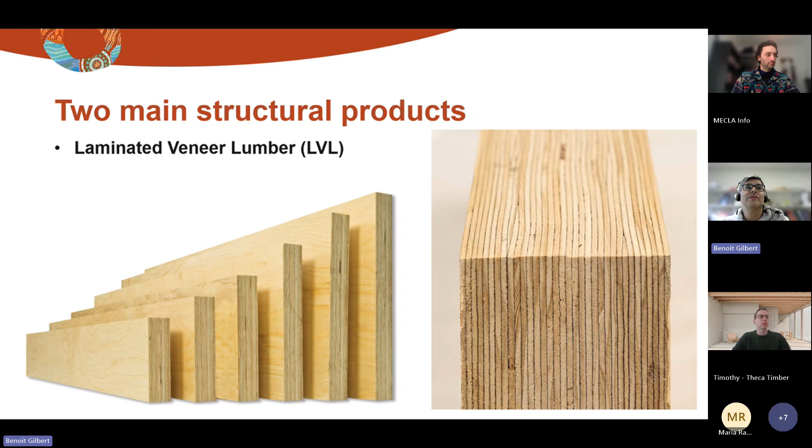The steering committee decided to look at two different structural products. The first one was LVL, laminated veneer lumber - I think you all know what LVL is, put it in the chat if you don't, but I believe you all know. The second one was glulam.

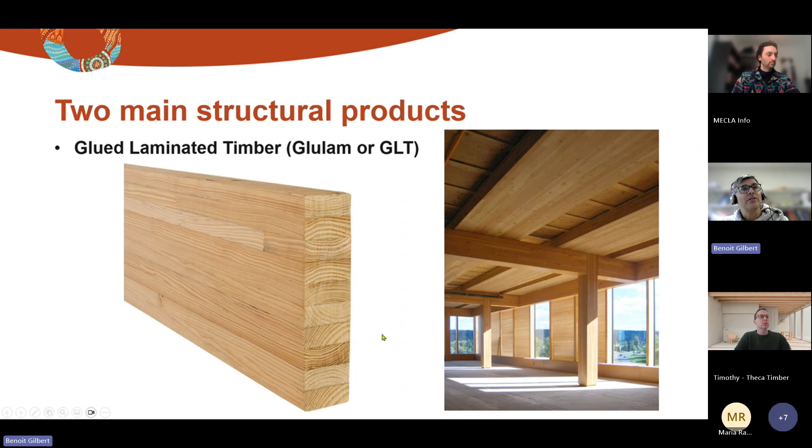So we're trying to look at what we can manufacture from these two products using the resource of interest. DAF's objective, or DPI's, was first a literature review. Then we needed to get some trees and look at the characteristics of the resource. Then we needed to assist and do some full-scale production trials, and then test the manufactured products.

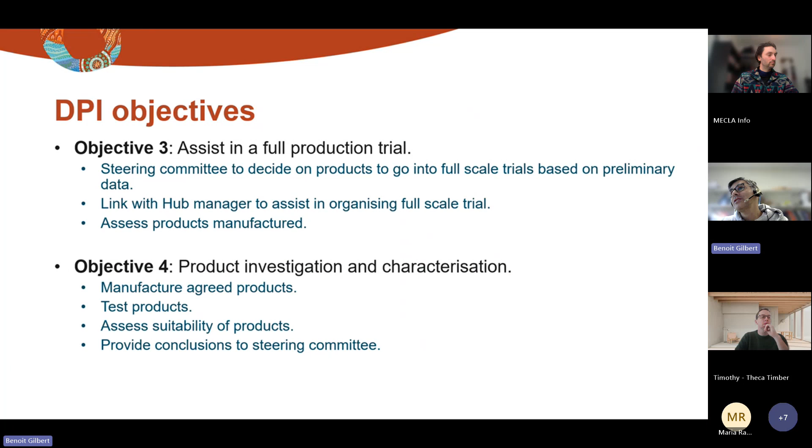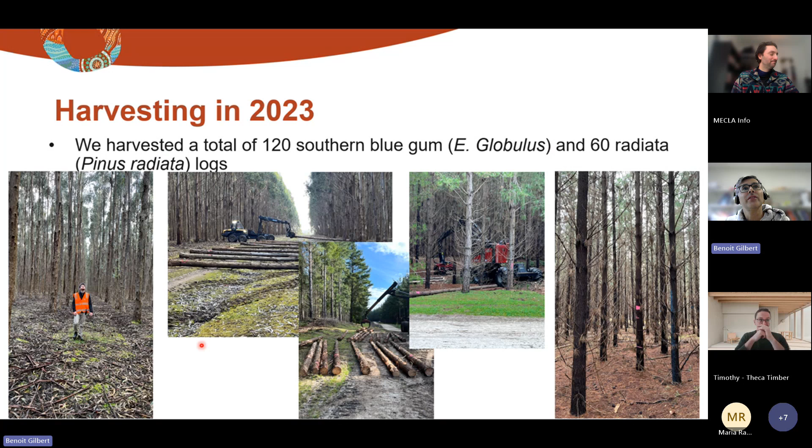So we harvested 120 blue gum logs and 60 Radiata logs. We targeted two different plantations for the blue gums, 15 years old and 19 years old, and for the Radiata we looked at first thinnings at 11 years old and second thinnings at 18 years old. All the diameters we targeted were average or relevant diameters for the project where there was a large volume of them.

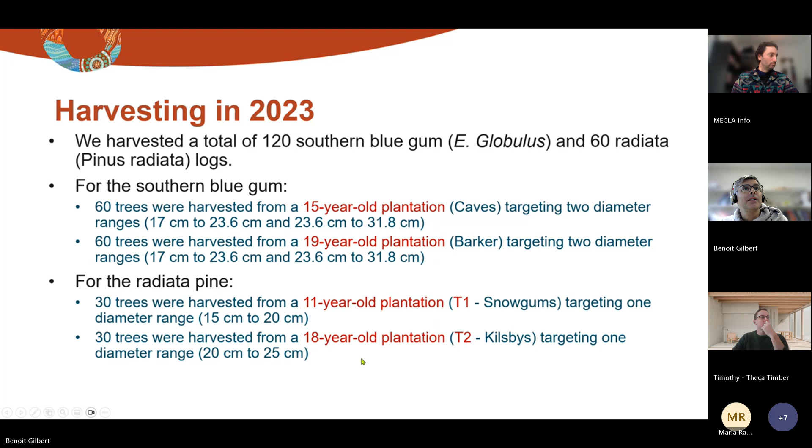Yeah, so there used to be a log. To me, peeling is like when you've got a toilet paper roll - it's basically the same. You peel the trees into veneers.

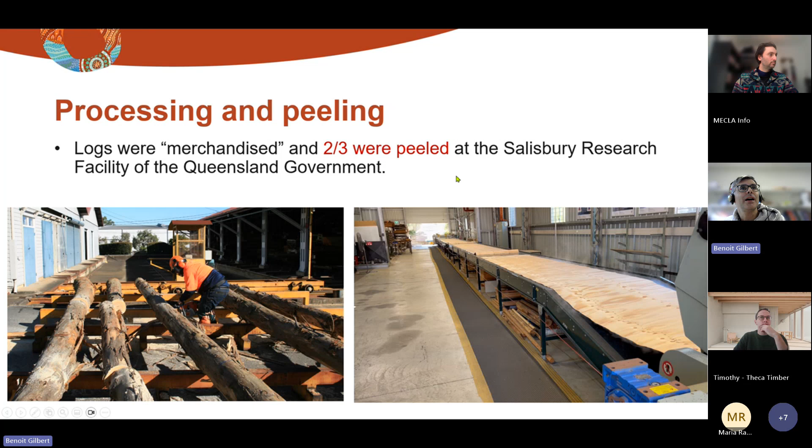So we've done that. We peeled two-thirds of the logs. We managed to get like 3 kilometers of veneer at the end. You can see a little bit on the right how much we peeled, quite a lot - one of the biggest at the Salisbury Research Facility.

And then we look at the veneer. We characterize the veneers for visual grading, MOE distribution, and also recovery, just to make sure that when we peel them, we've got enough veneers to manufacture LVL.

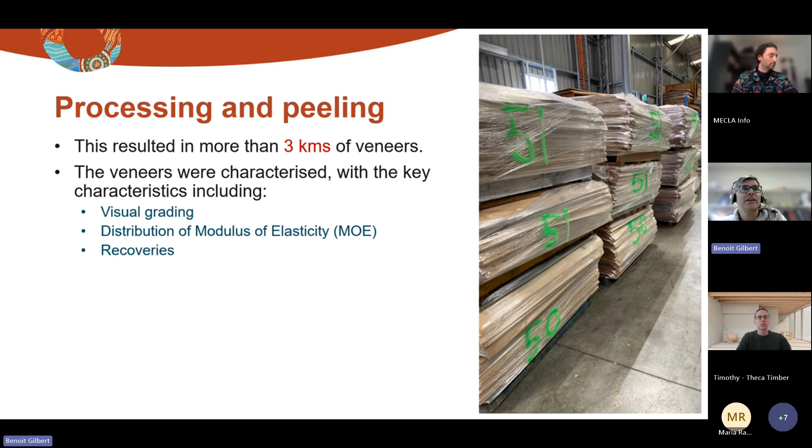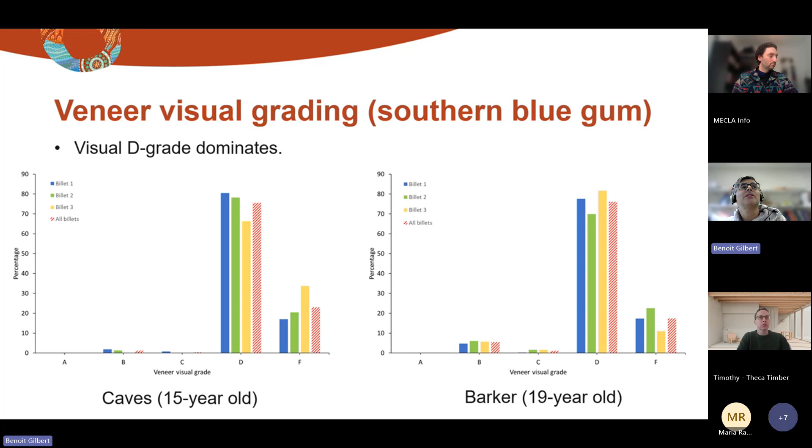So interestingly, in terms of visual grading, we mainly have D grade. A grade is the nice top visual appearance veneers. D grade you can't use that for visual products. That's what most of the veneer were - D grades, a few failed as well, and it was the same for Barker. We only had D grade veneer, or veneer that we couldn't use in the manufacturing.

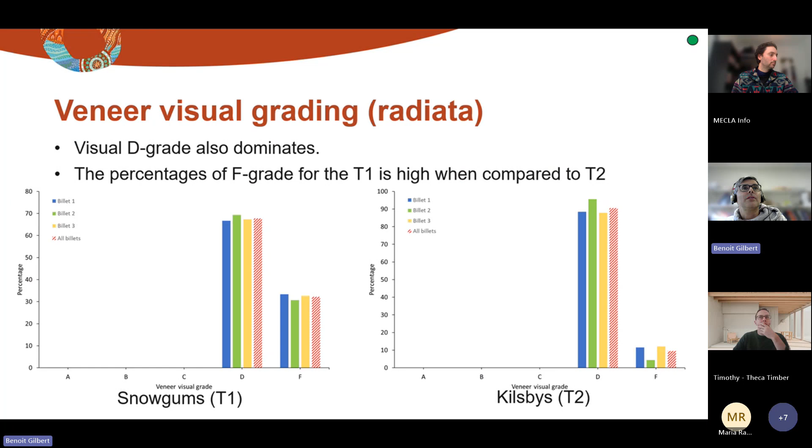So the result of that is that you cannot make appearance LVL - it cannot be manufactured. You're always going to get a product that doesn't look nice. It doesn't mean that it doesn't perform, but in terms of appearance, you won't be able to do that, unless you buy nice veneer from another source and put it on the face.

But however, if you're looking at the MOE distribution - if you know MOE - for the 15-year-old blue gum, the average MOE of the veneer was 15,000 MPa. For the 19-year-old site, it was 20,000 MPa. This is high, this is very, very high. So despite being a resource grown for volume, it still produces veneer of very, very high MOE values. MGP10 is half of what we get on average for the blue gums. For the radiata pine, we had on average between 8,000 to 10,000 MPa.

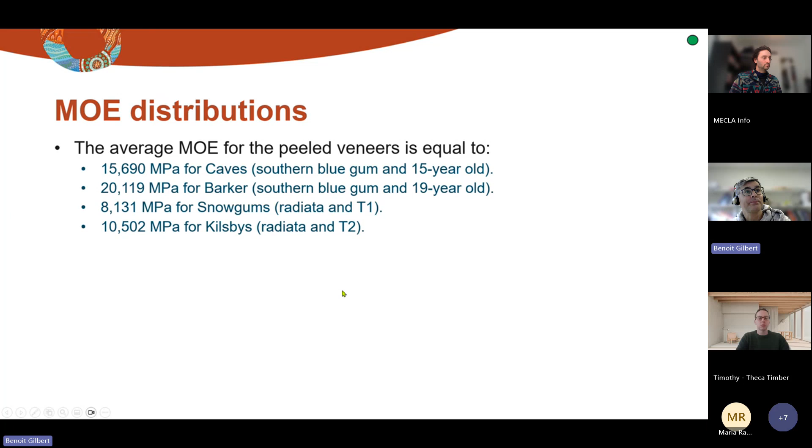So just a bit of distribution, MOE distribution. If you look on the right-hand side, this is some MOE distribution for the 19-year-old site, and you can see that 50% of the veneers got an MOE higher than 20,000, and we can even go up to 30,000 for the top veneers. For the younger site it's a bit less, but still we can recover a lot of veneer with very high MOE.

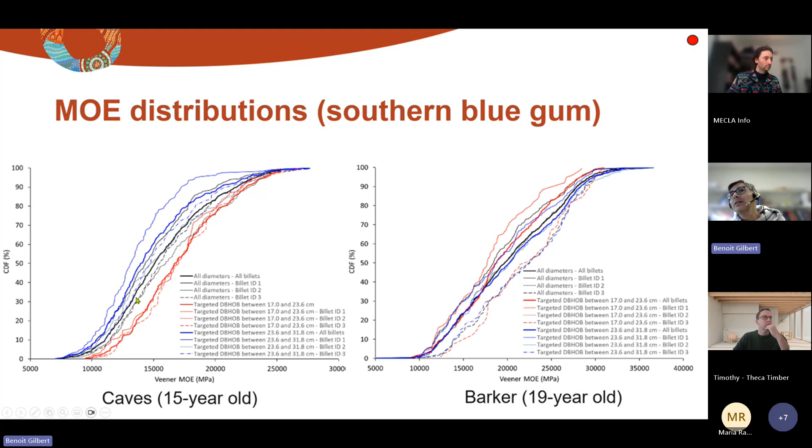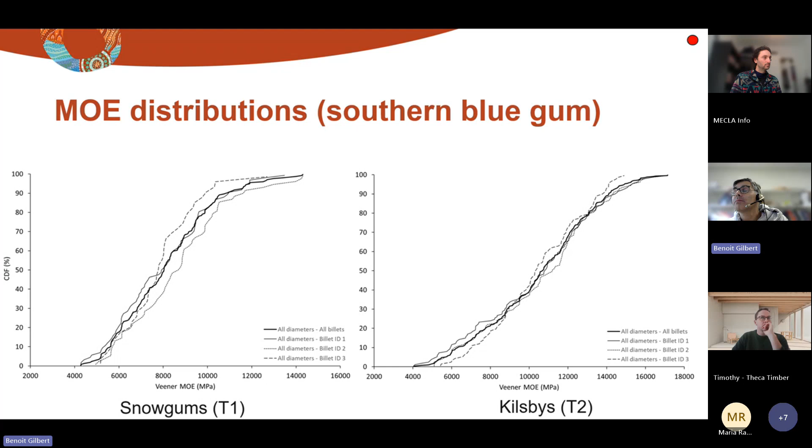And for the - that should be a radiata pine - for the radiata pine, we've got of course the MOE is less, but we still got, for instance for the T2, still 50% of veneers got an MOE higher than MGP10. So we can still recover some high quality veneer with high mechanical properties.

And if you're looking at the recovery, it's basically similar to the current industry recovery, which means that when we peel, we're not going to reject more veneers than is actually currently encountered in industry. So recovery is good, it's matching what the industry sees, so it can be used. Point is, the resource can be used for manufacturing LVL.

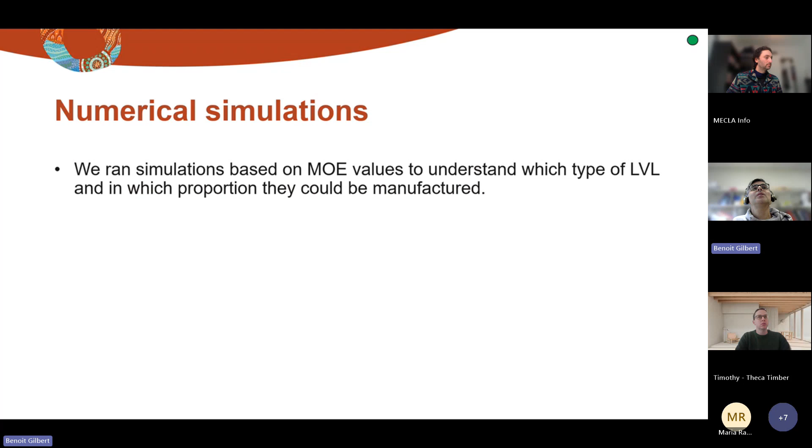So we've done some numerical simulation just to understand which type of LVL and which proportion they could be manufactured in. And we try to look at different scenarios - either manufacture 100% blue gum LVL, or hybrid LVL, which uses both radiata pine and blue gum veneers. And we try to do some LVL 15 to LVL 21, so it's very high - the 15 and 21 are the MOE values.

LVL 15 and 21 are very high value products, very high performing products. And that's what the market analysis shows, that there is a niche market for very high performing LVL to replace steel in houses. And LVL 12, which is very similar to MGP 12, is going to be a commodity product. So we're trying to see if we can manufacture commodity products as well as very high performing products from the resource. And that's the interesting part.

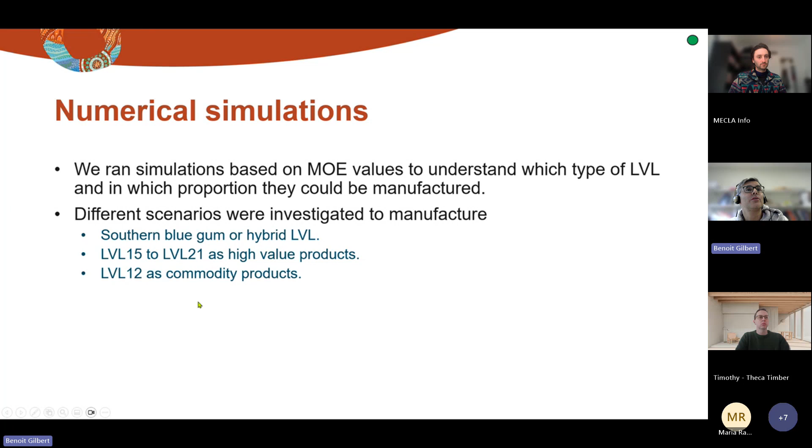So if we're only doing blue gum veneers, a manufacturer could use 80% of the volume of the veneers to manufacture LVL18, and then we're just going to get 20% to use in the low performing products. However, we could use 100% of veneers to manufacture LVL15 - so we can use all of the veneers and we know we're going to get LVL15, a high performing product.

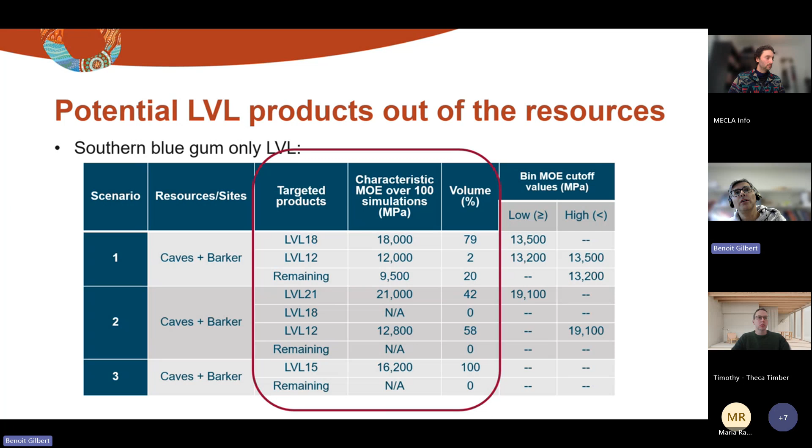And then if we want to go to even higher performing products, we can use 40% of our volume to manufacture LVL21, and the remaining volume, 58%, we can manufacture LVL12. So the idea with this simulation is a manufacturer could basically have two different products - one commodity product, but we still have enough volume to manufacture one of the high performing products.

And if we look at hybrid, it's the same. We alternate veneers between blue gum and radiata pine. We can use 23% of LVL18 and 64% of LVL12, or we could also manufacture 63% of LVL15.

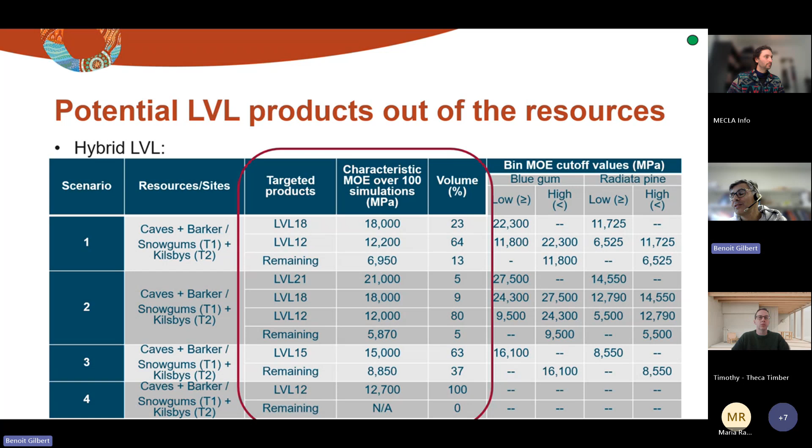But if we're using all of them, 100% of the veneer can be used to manufacture LVL12. So there is a high potential to manufacture high performing products or commodity products with the veneers, and that's a big outcome for the project - yes, you can manufacture from commodity to high value products with those resources.

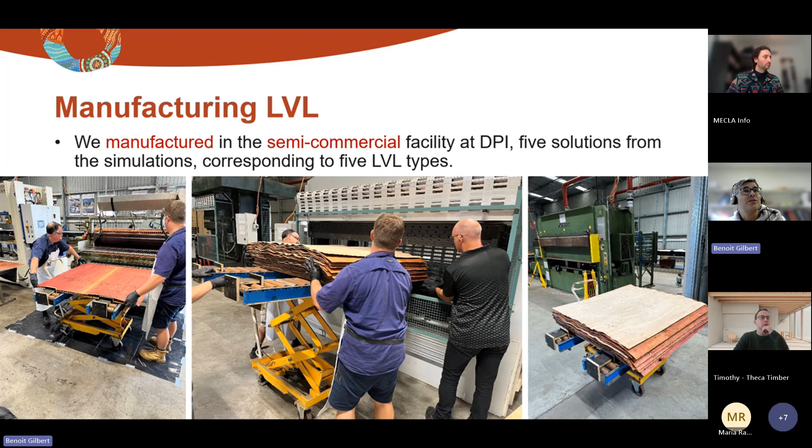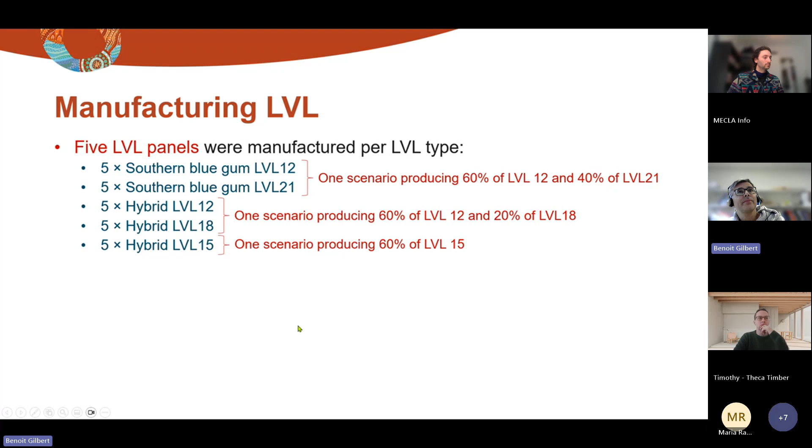Then we went on to manufacture the LVL. This is a team at Salisbury manufacturing some LVL in our semi-commercial facilities. We did 5 different types of LVL. The first scenario, we can manufacture LVL12 and LVL21. Another scenario, a hybrid where we manufacture LVL12 and 18. Another one, we're just trying to do 15 as a hybrid product. So we manufactured those scenarios and tested them in bending, shear, and compression.

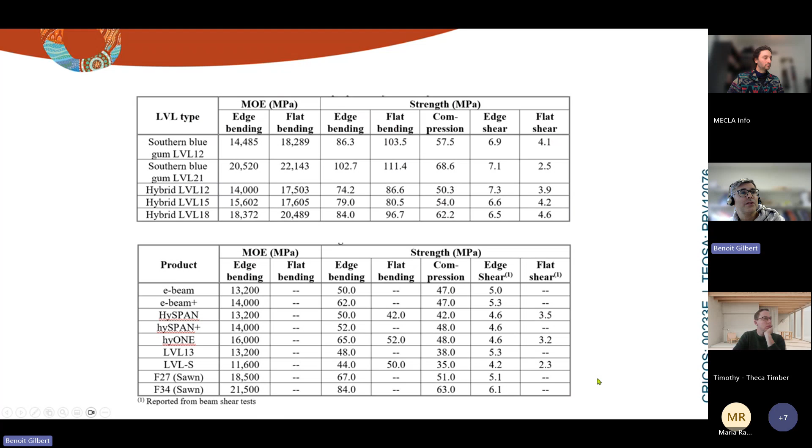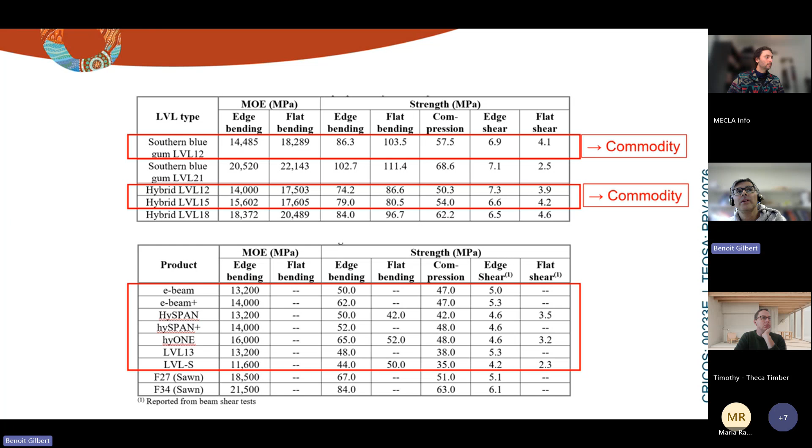When we've done this, at the top are our results, and at the bottom are some LVL that you can commercially buy. If you're looking more at the commodity, which is LVL12 and LVL15 - a bit at the border - it either equals or performs better than the commercial products. So we can manufacture products that can directly compete with commercial LVL.

If we're looking at the high-performing LVL, you cannot find some on the market, so we compared them to the F27 and F34 sawn timber. Once again, they perform as well or better than the very high-performing sawn timber. So if you can't find F34 sawn timber, you could actually replace it with one of the high-performing LVL.

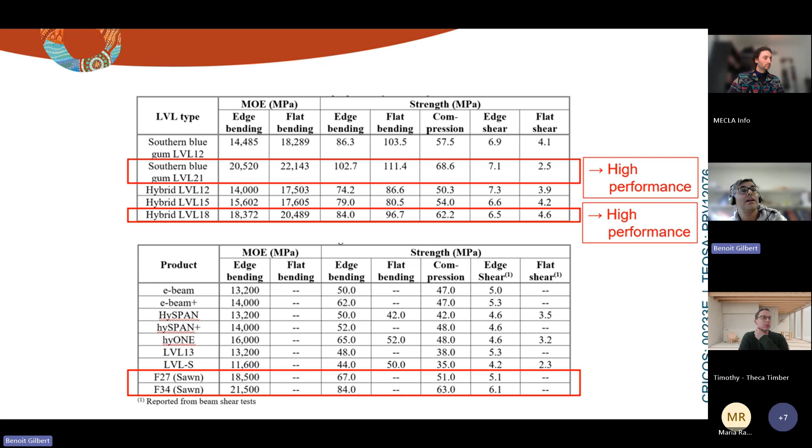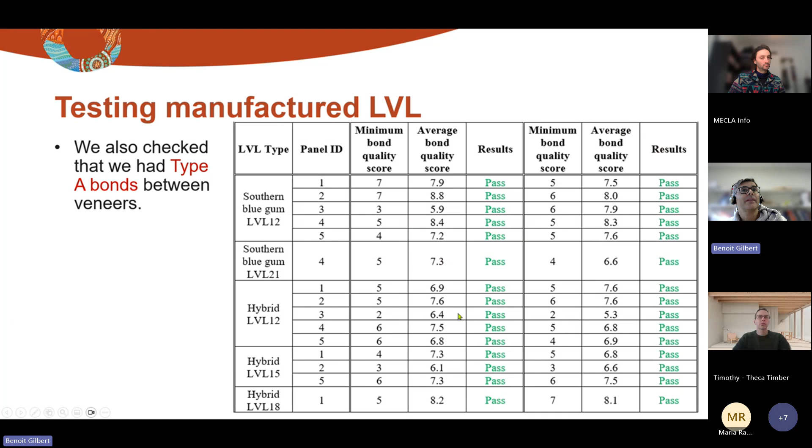Yeah, that's how it comes. We also checked that we can glue it, and you can glue the LVL, so you can pass all the durability bond tests between the veneers. So we know we can glue it, we can manufacture high-performing LVL.

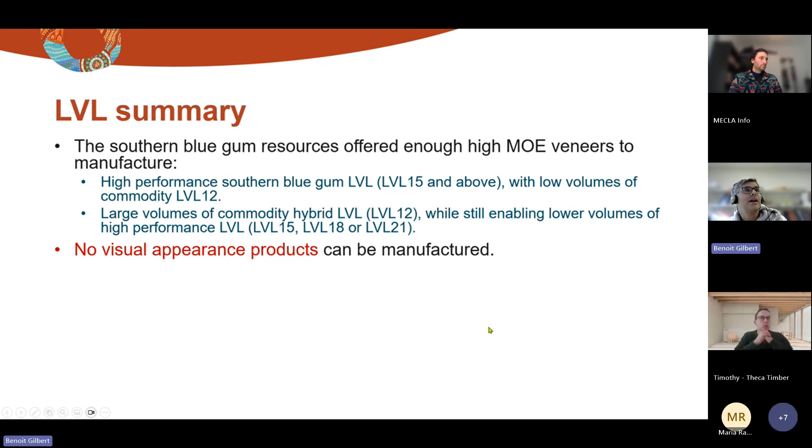So in summary, basically the resources offer - you can manufacture high performance LVL and a little bit of commodity, or you can do a lot of commodity if you do hybrid, but you can still get a lower volume of high performing LVL. So you can have different strategies, but you can get basically good LVL products if you want, in one way, but you just can't get visual appearance products. And we can glue the veneers - it's not an issue, just a little bit of a trick in the glue manufacturing process.

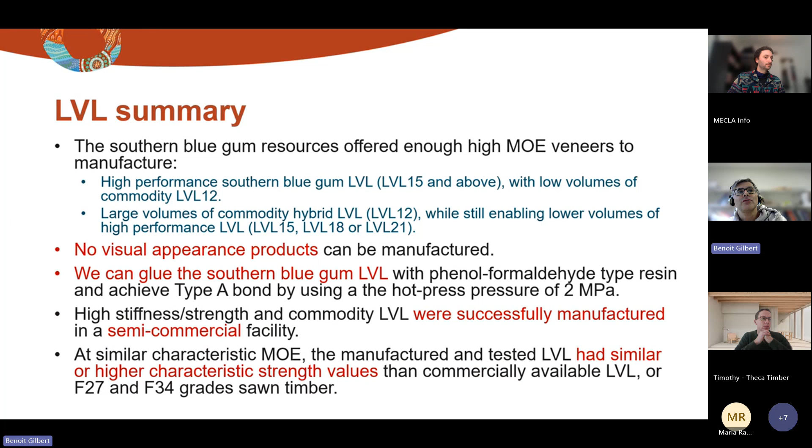All those products are as good or better than commercial products. So it could be manufactured, and it's a no-brainer. It can be done - we've done the basic research for that.

It can be done. The issue with LVL is that you've only got one company doing it in Australia, and they've got their own resource. Hopefully you'll get another one starting soon in Victoria, but not a continuous process. There are companies in Australia which just still do not have the capacity to manufacture the product yet, so they will come. But basically, that study shows that the resource will work for that.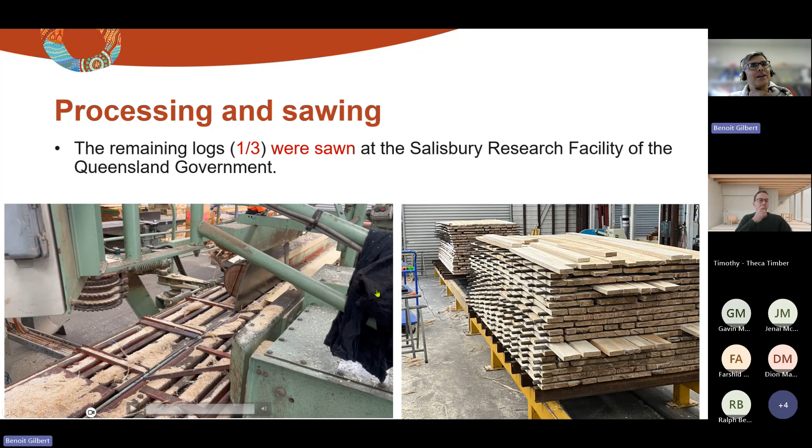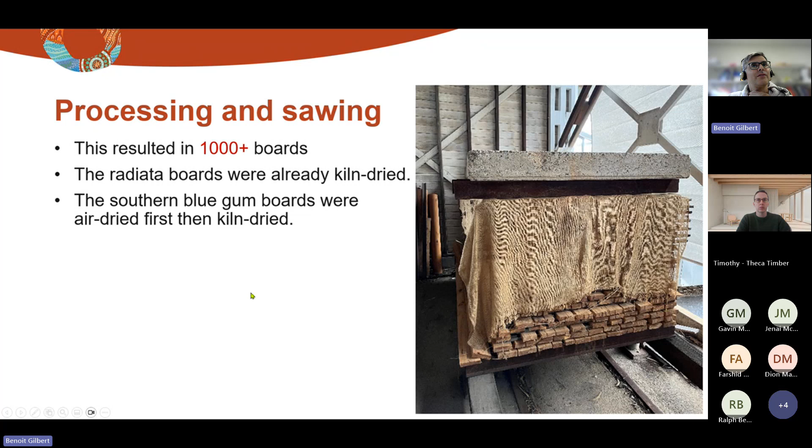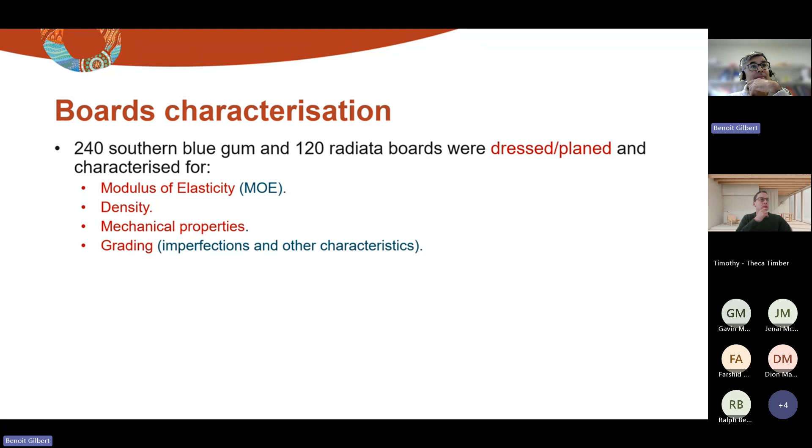We've got about more than 1,000 boards. We dry them, either kiln dried or air dried, to get the final boards. Then we took 360 boards - we dress them, plane them, and characterize them for MOE, density, mechanical property, and grading. We grade them according to the Australian standards, and measure the imperfections before and after planing. The issue with globulus is that it's a species that can twist and curve a lot, so it doesn't stay straight when you dry it. We try to characterize the imperfections just to give a bit of information to the industry.

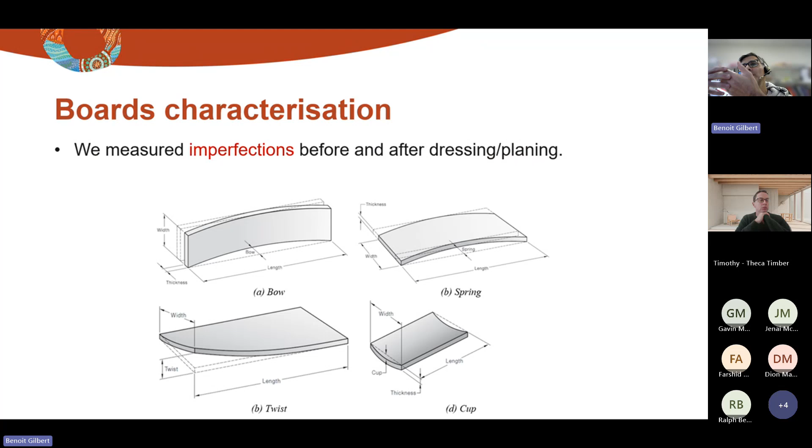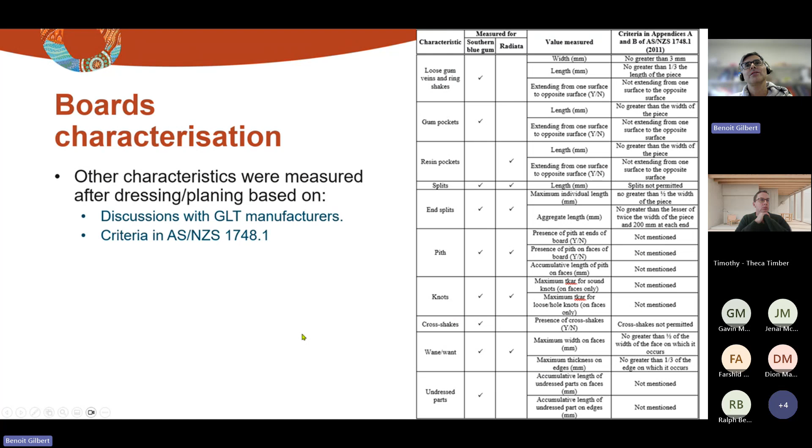We also looked at a lot of different characteristics in the Australian standards. I'm not going to spend too much time on that, but just to give information about the industry and what the resource looks like.

Then we test the board in tension, shear, compression, and measure MOE and density. Just to quickly show some results, this is tension for the southern blue gum, and you can see on the right hand side a very large variability in the MOE results. You can go up to 20 MPa in tension, up to 140 MPa, mainly due to the knots and other defects.

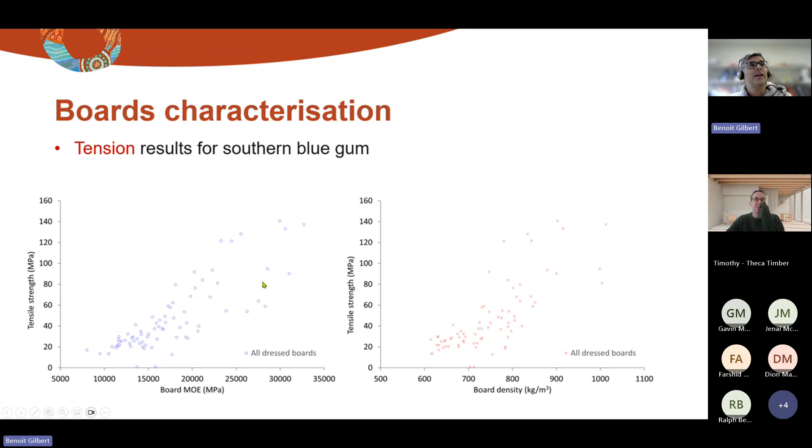If you look at radiata, it's the same. You've got some boards that couldn't even take the minimum load the machine was applying, but it doesn't take a lot of tension for the radiata. You can still try to fit some equations, and I won't spend too much time on that, but you can start to predict the strength based on different equations we developed.

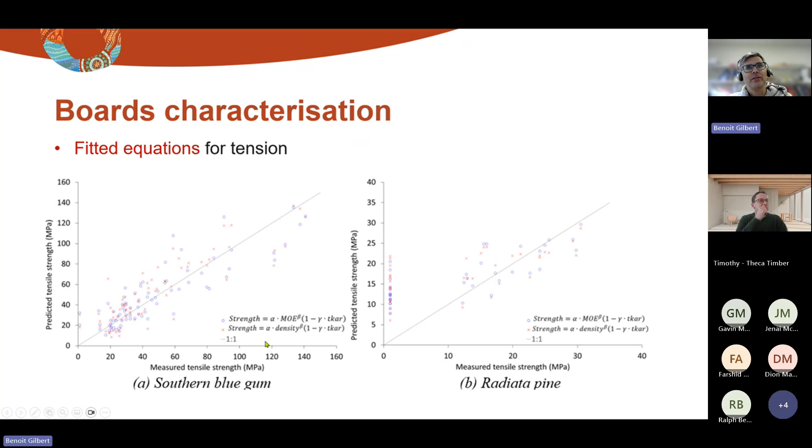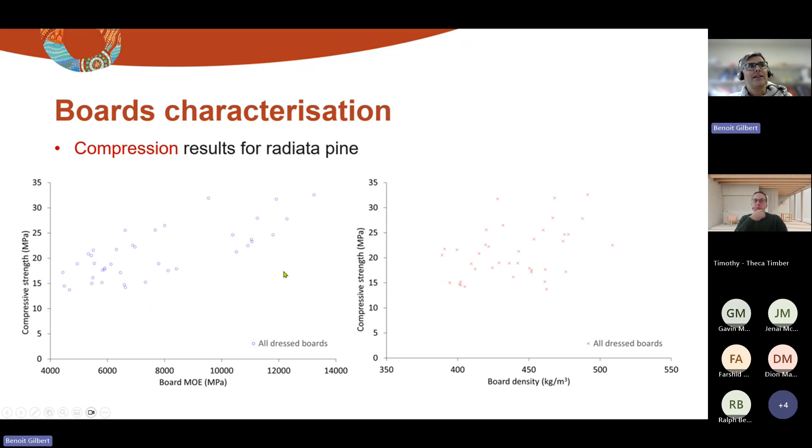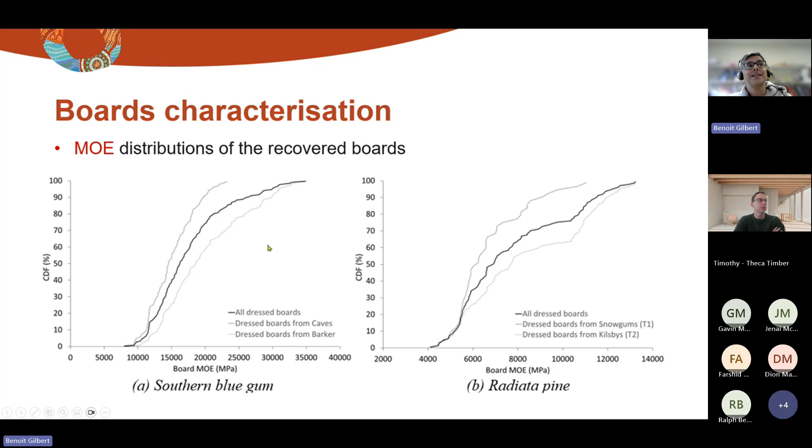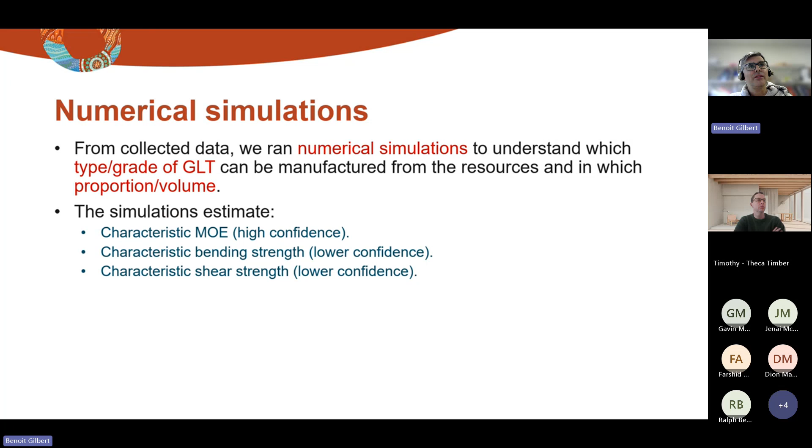Again, we did some numerical simulation to understand which type of glulam we could get and in which volumes. We estimate the MOE, bending strength, and shear strength with different levels of confidence in the results. The market analysis shows basically what we need.

We need GL18 and GL13 in the Australian standards. GL18 is a high performing product, GL13 is more of a commodity product.

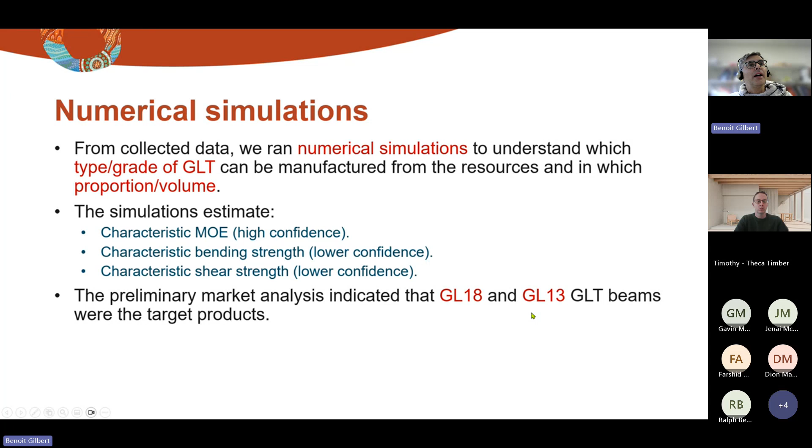So if you look at different scenarios, if you try to do only one southern blue gum glulam, you should be able to get about a GL17, GL18, maybe GL13 in bending strength, but we're not very confident with that value. So we're going to get about GL17, 18 just by only doing one blue gum product.

If we try to do two different products, 40% of the board could be used to do a GL18 and 60% to do a GL13. So you can still use your boards in different ways to be able to do two different products.

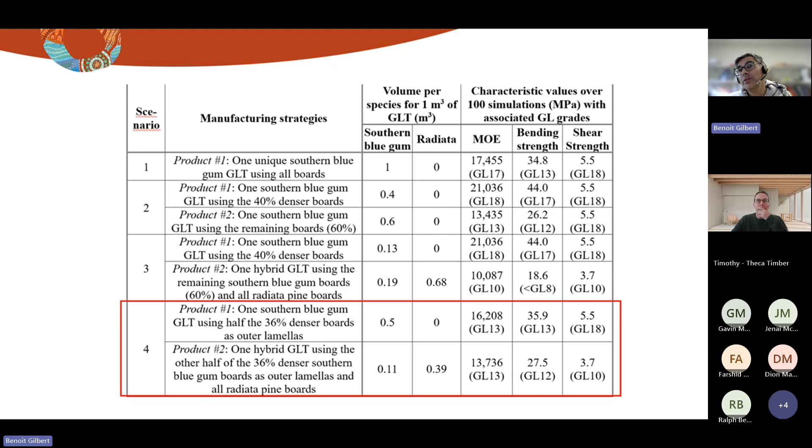If you try to do a hybrid product, you could also get a GL10 and a GL18. Again with hybrid products, you could get two GL13s, one purely blue gum, one hybrid. So there is a way to mix your boards to get both commodity products and high performing products.

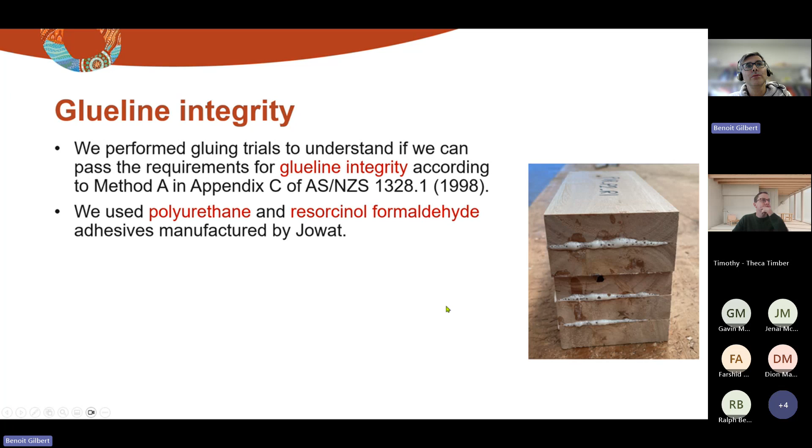We did some gluing trials. We tried to glue the boards for durability, using different types of glue, and we found that the high density boards, greater than 850 kilograms per cubic meter, were very hard to glue. We found that if you put them through a planer first and sand the boards after, you actually manage to get satisfactory bonds. But we know that in a commercial trial, you need to be careful how you glue those high density boards. It's about 20% of the boards.

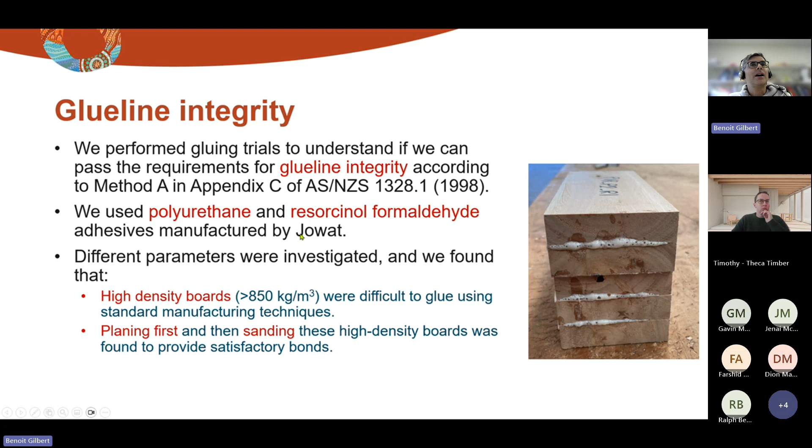We did some finger jointing as well. We had a bit of an issue finger jointing the boards, but it's also because we were not very well set up for that, so we still need a bit more work in this area. It didn't work very well, but I think it's more us than the resource.

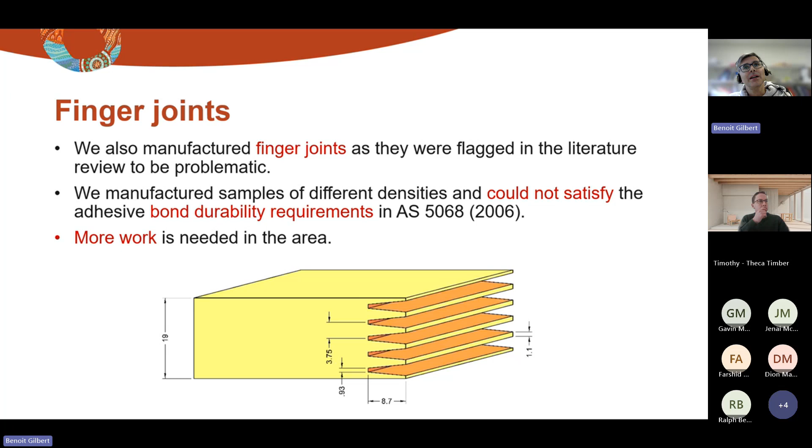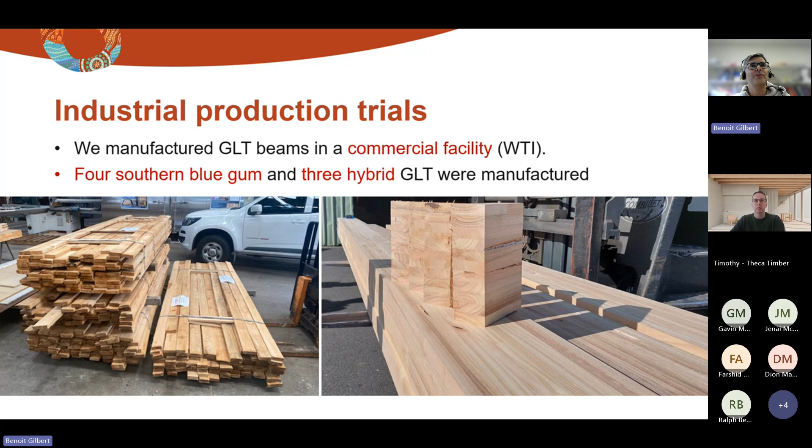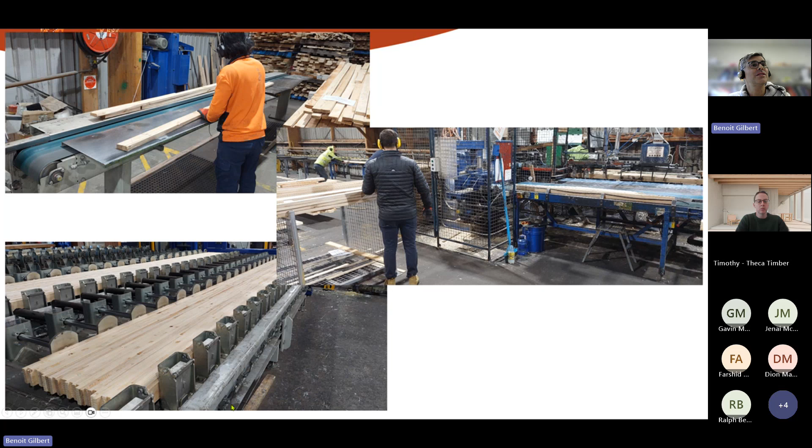This is some of the manufacturing at WTI - the grading, the finger jointing, and the board in the press. And this is a team at WTI with the manufactured beam.

They really loved it, and I'll talk about that later. They were fantastic, so helpful. What they found is that these products can be produced in commercial facilities.

We had a bit of an issue with finger jointing, but that was because we had very thin boards. They don't see there should be an issue when a thicker board is delivered, so they don't find that an issue.

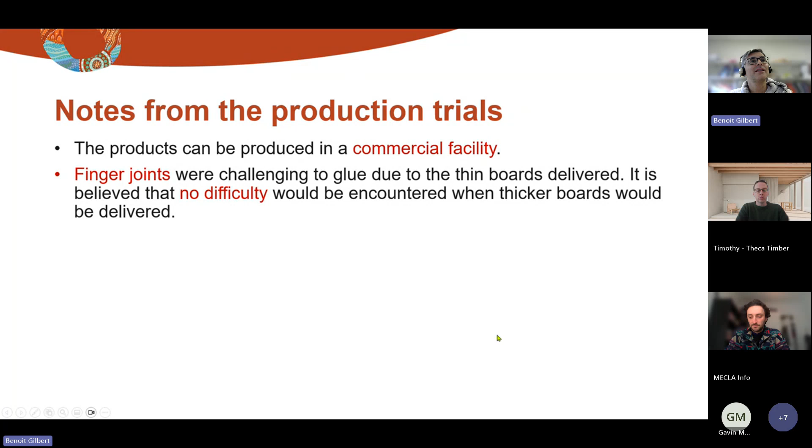The resource is very well suited for manufacturing GLT because there is no structural market for it - it cannot be used for framing.

If you've got a defect, it's easy - you cut the defect, you finger joint the board. So you could actually, what they're calling, upgrade the board by removing all the defects and getting a higher performing board.

Even if you've got a lot of imperfections in the boards, like cupping or bow, they say well, if you saw it a little bit bigger, we can plane the board first, remove all the imperfections, do our grading, finger joint, and then manufacture the GLT. So it's just one additional step to get rid of the imperfection, but they don't see it as an issue.

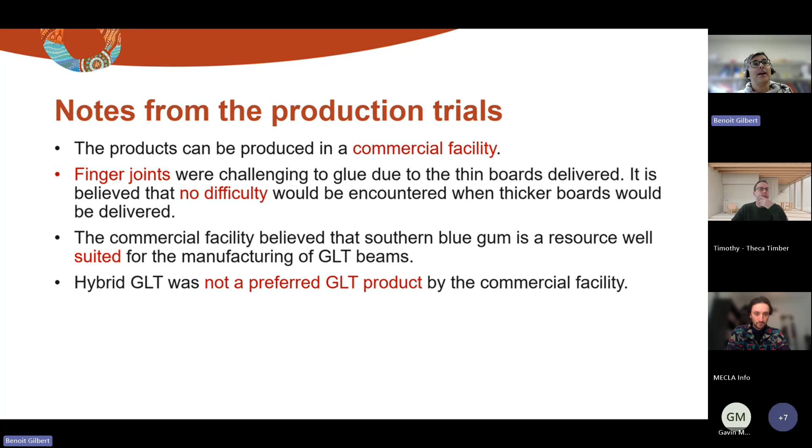They loved the project so much that they actually got a partnership with a mill to be able to saw those boards to the dimensions they want and manufacture them. And they love it because they can access this resource at a lower price - there is no competition on the resource.

The grower is happy because they're going to sell trees at a higher price - it's a different market than wood chip. So that's a huge outcome for the project.

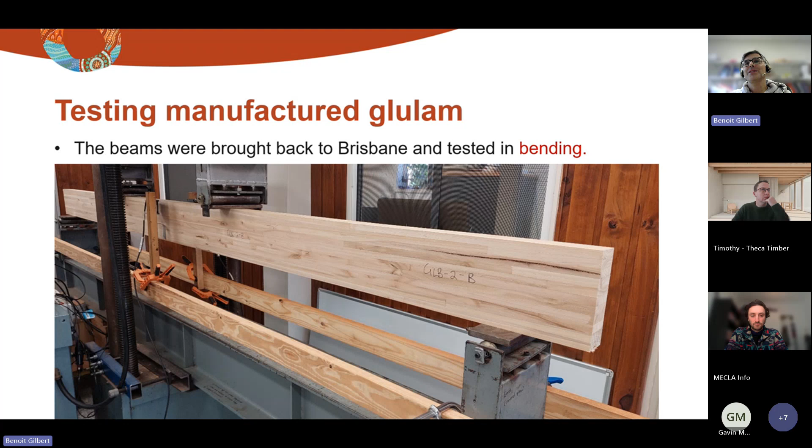When we manufactured the beam, we brought them back to Brisbane, and you can see how beautiful the beam is. This is manufactured from a tree that was going to be used to make paper - that's crazy how beautiful the beam is. And that's another beam being tested in bending.

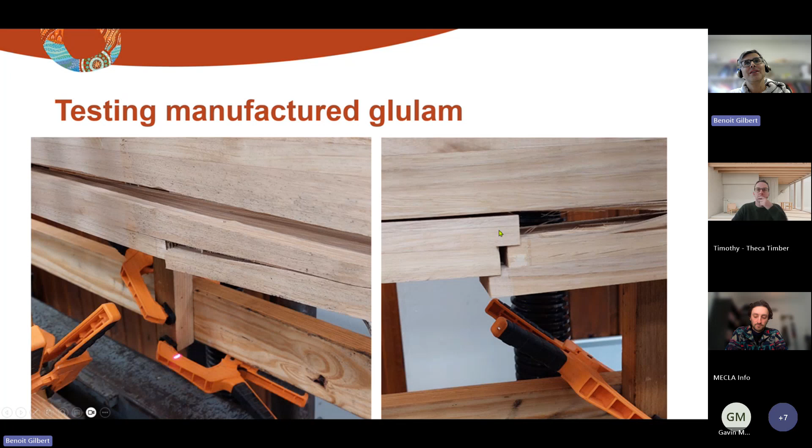We had a bit of an issue with the manufacturing because the board was too thin, so unfortunately it failed at the finger joint, but that can be fixed. So we're not going to look at the bending MOR because the failure was very premature due to the finger jointing. But in terms of MOE, we can reach GL18.

For the bending MOR it was less because of premature failure - only GL10 - but the shear was good.

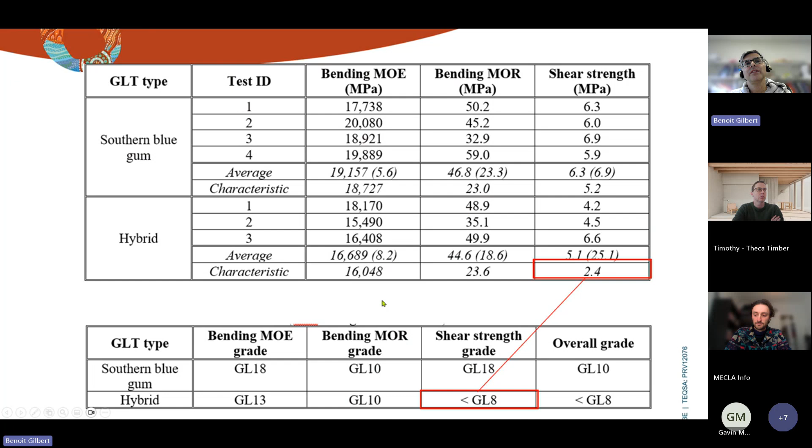For the hybrid beam, in terms of MOE it was GL13, GL10 in terms of bending, and the shear was less than GL8, but I think that's because we didn't have enough test results. Overall, if we're only looking at the MOE, it's stiff enough to make a commodity and high-performing product - we just need to figure out the finger jointing.

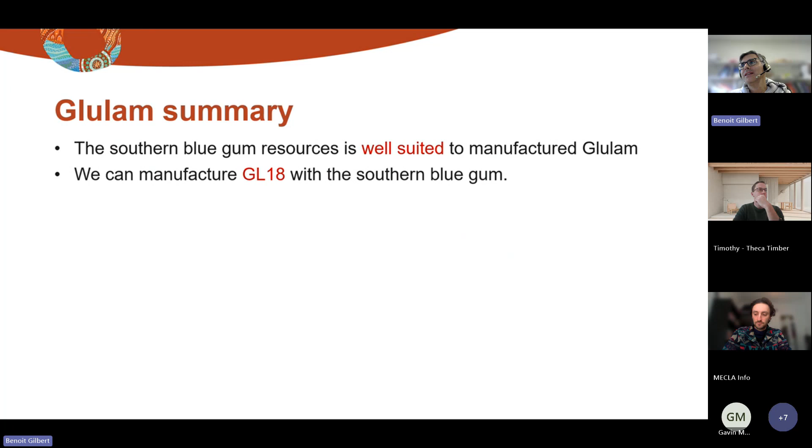So glulam summary: the Southern Blue Gum is well suited to manufacture glulam. We can manufacture GL18 high-performing products, which are typically going to go into houses to replace steel. It's a bit hard to glue, so manufacturers need to ensure it passes Australian standards, especially for the high-density board.

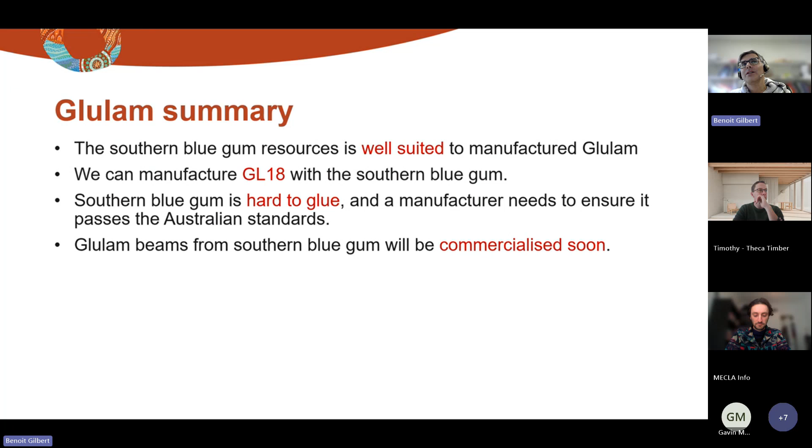It's apparently going to be commercialized soon - that's the last I heard, but maybe Gavin's got more news on that.

So I want to acknowledge - sorry, I already gave the conclusion for the LVL. I think I'm probably on time, but for the LVL, we can't make visual appearance products, but we can make very high value LVL commodity products.

There is no technical challenge - it can be manufactured, it can be peeled, the recovery is good. It performs as well or better than commercial LVL, so it's basically a no-brainer. We just need the facility in Australia to be able to manufacture them.